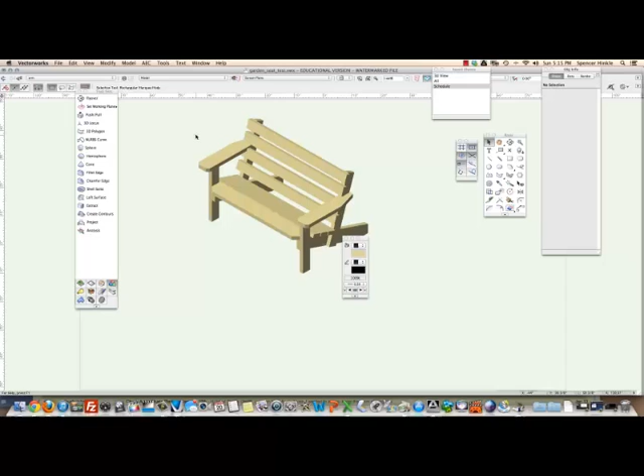If I go to a right isometric, it's going to look something like that. What we're going to do now is set up different views or different sheets. You can use those two terms interchangeably. To Vectorworks, a view is a sheet, something that you would print on your printer. So we're going to set up a sheet for the model, the 3D model, and we're going to set up a sheet for parts so that we can show all of the dimension parts separately, and we're going to show a schedule which gives us a list of parts and their sizes and number of pieces.

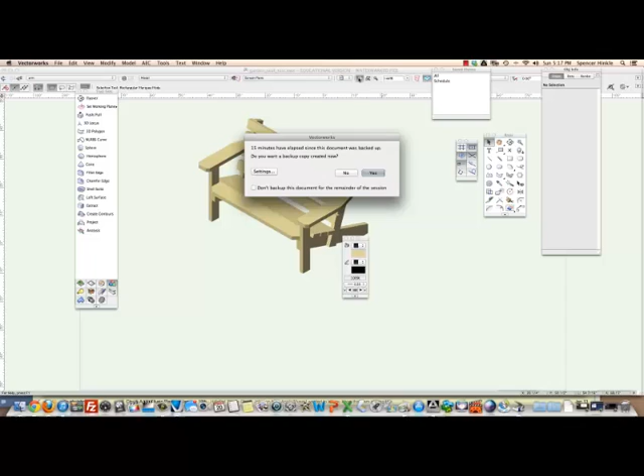Now the first thing that you want to do is fit to page area. You want to go right up here to fit to page area and click on that so that the sheet that you've chosen, in this case that's either 11 by 17 or 8.5 by 11, that's the size it's going to fit it to, and I always like to come back to that size because that sort of grounds me.

Then I'm going to come in here, go to Save View. I'm going to call this 3D View. I'm going to go ahead and save the orientation just so that it always comes back in right isometric, because that's the way I have it right now.

Now you'd want to think about this up front. Is that the way I always want to see it when I open up this view? Is this the view I'm going to want to have when I print it? You can change it, of course, but it makes it more difficult if you have to change it every time you open the thing up. So for me, that's going to be fine.

Save the zoom and pan. That's going to always bring it back to fit to page area. Save page location, and I'm going to leave rendering mode, save rendering mode and options off, because I'm going to want to change that later on. Alright, so we'll leave that off.

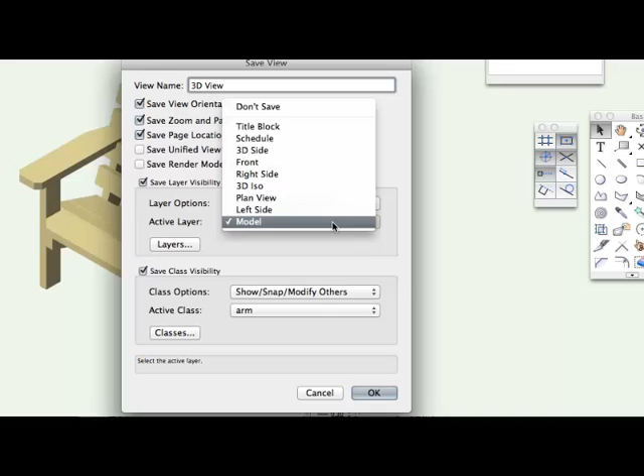Now down here, the active layer is going to be model. That's the layer that we drew everything on, right? And there we go, okay, and that looks good.

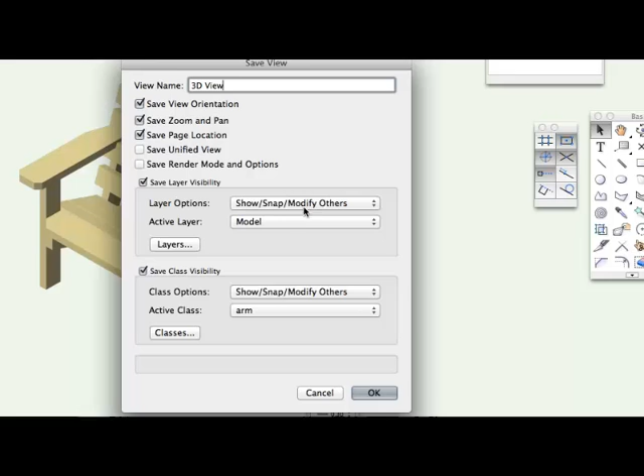Click OK. Let's go down here and make sure that model is indeed the active layer. Show, snap, and modify others, that's fine, just leave that on. Let's come down here to classes, and I think the ones you want turned on are all of the parts. You don't have to have dimension because we're not using that class. Front legs, none. Seat boards, seat front, leave all of those on. Now none, well actually I did draw, let me see here.

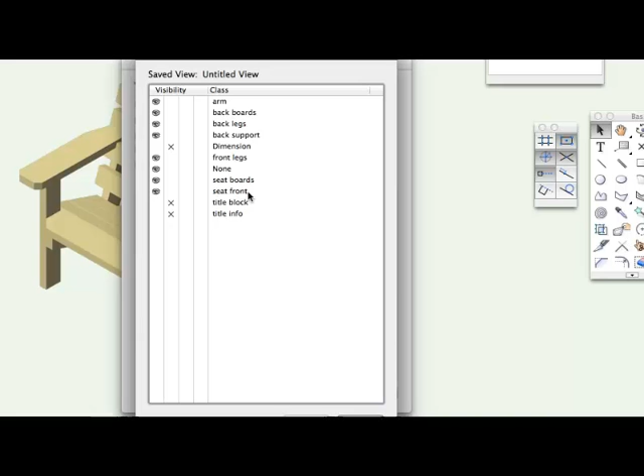Let's go ahead and save this. I want to show you something. I inadvertently, just like I told you not to do, drew everything on the none layer, or none class. Now, you know, it worked out fine. We've got a bench, I've got a bench just like you. But we should have been, as we went along, changing these to match the part to the class. So I'm going to do that right now.

It's nice that you know, you can go back and do it. I'm going to hold the shift key down and select all of these backboards and change the class to backboards, and then I'm going to select these guys here, and that is the back support. Get these legs here. Oops, get there a little more. There we go. And these are the back legs.

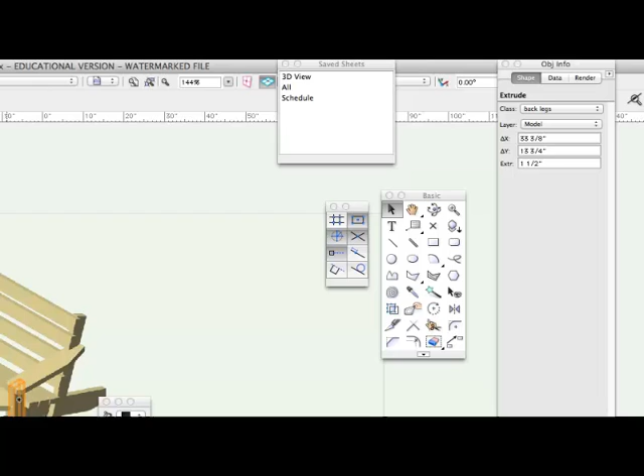Let's do the arms. One arm, two arms. Get them on the arm class. And the front seat front. And then 1, 2, 3. Did I get all of them?

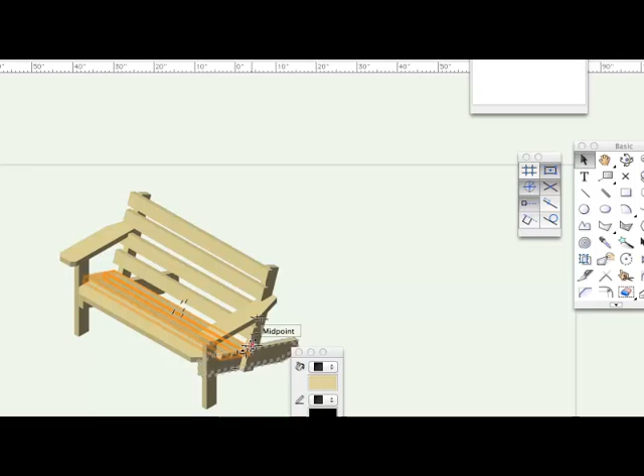There we go, all three of those are selected now, and these are the seat boards. I think the only thing I missed is this and this.

And I just realized that I never drew the little arm supports in, so I need to do that. See, these are the front legs, okay.

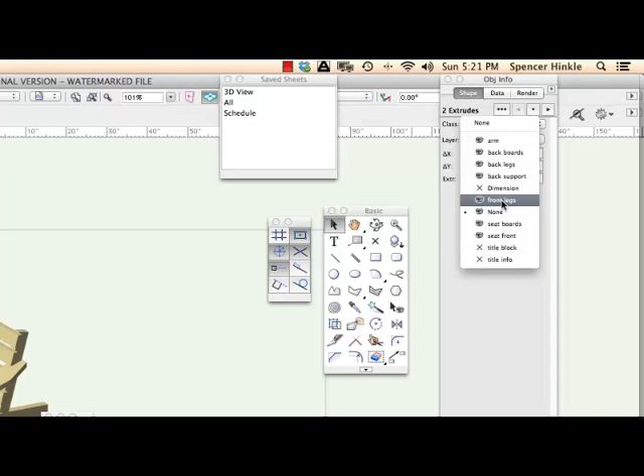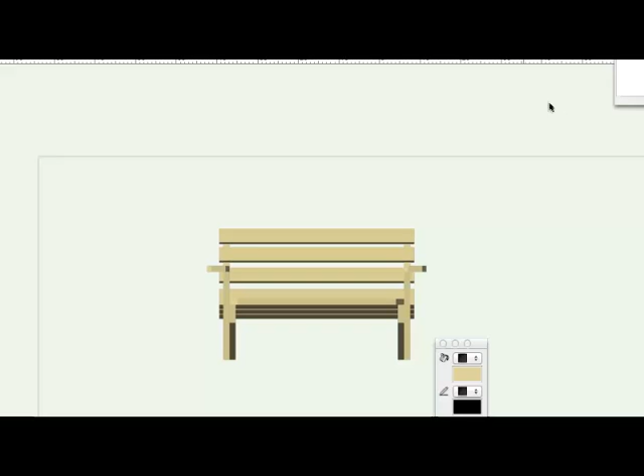And if I go to front view here, let's go over to View, Front. So I'm going to draw that little arm board, the little arm support, using the polygon tool.

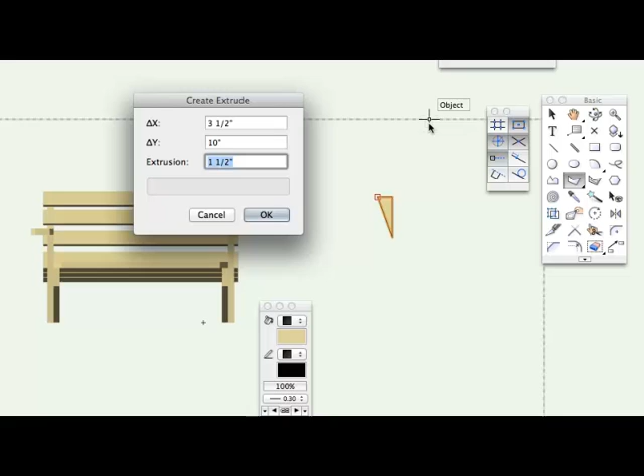Go 3.5 inches, come down. I don't remember exactly what it is, but it's something like 10 inches. And then come up, and then extrude it to 1.5 inches.

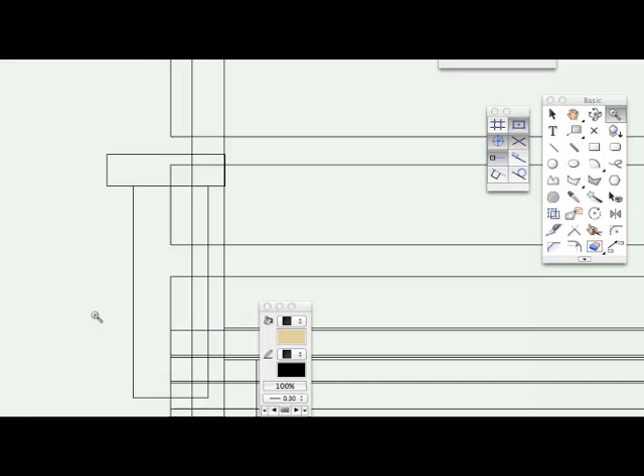I'll put this one in place over here. Now it looks like it's in the right place, but I would be willing to bet that it's not. Actually, let me go wireframe on this.

Okay, so let's get it right there.

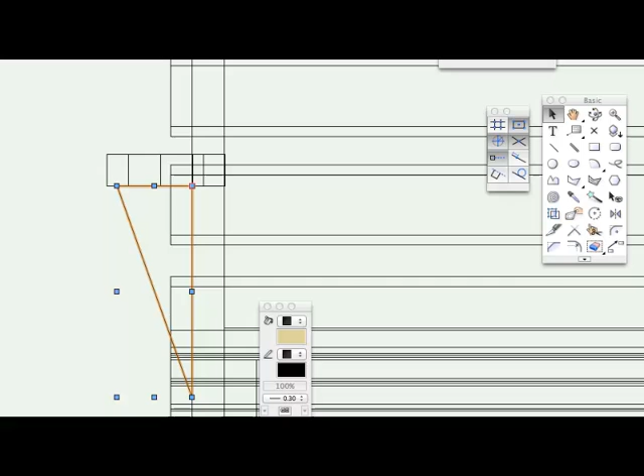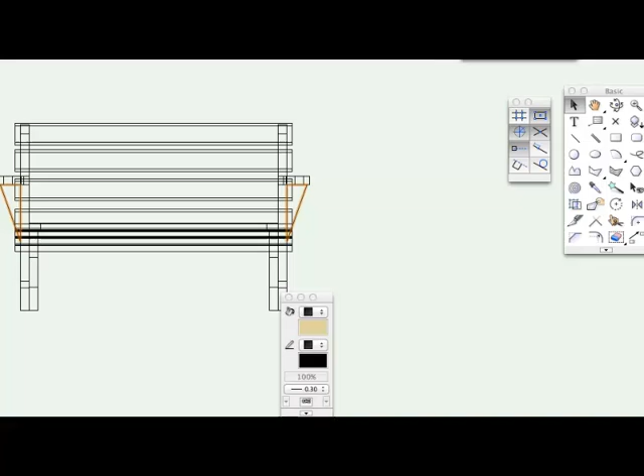And I'll go ahead and copy the other one, mirror duplicate that, find the center, and now make sure that they're both selected. And of course, they're way in the back there. There we go, now we got them.

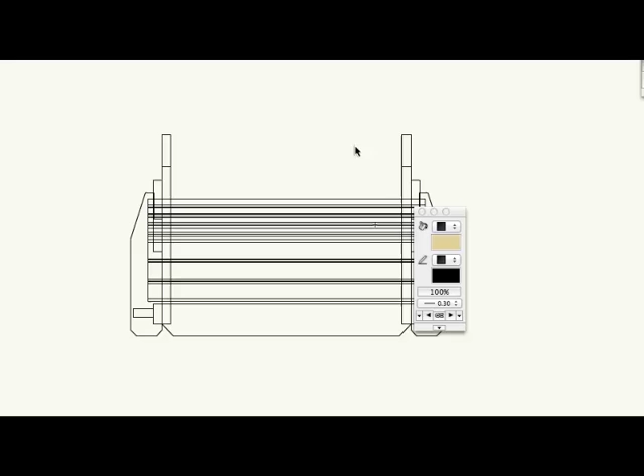All right. And I don't believe I had a class for that, but we'll just put it on the arm class. That'll work out just fine.

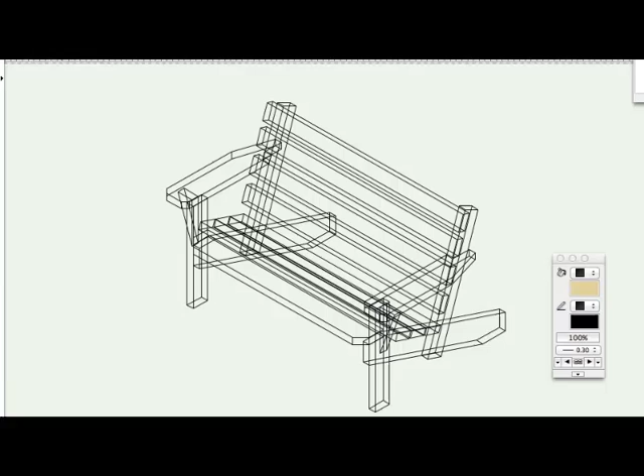Let's now go back to our view, standard view. Let's go to right isometric and view. Let's render it, just go OpenGL. There we go.

All right, great, so there's our model. We can see our little support boards there. So now we have a 3D view.

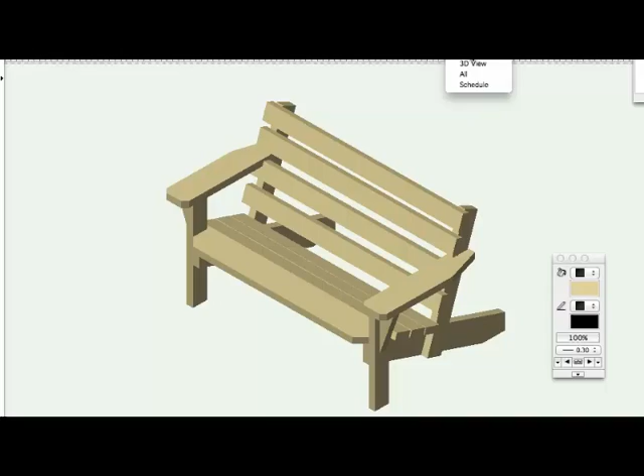And now we're going to create a view called parts. So let's go save view, let's call it parts, and save view orientation. Let's get rid of that because on this sheet we're going to have multiple orientations and we don't want it always going back and having to change it. I like the zoom and pan to save the page location. That's fine, and turn everything else, and rendering I'd go ahead and turn that off as well.

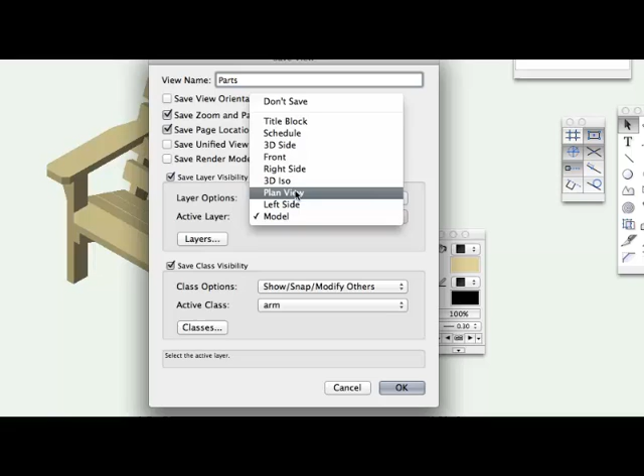Alright, so in this one we're going to make the active layer plan view, and this will reveal itself as to why later on. Let's turn on everything - oops, no, we don't want schedule. Let's turn on 3D side, front, right side, 3D ISO, plan view, left side, and then turn off the model.

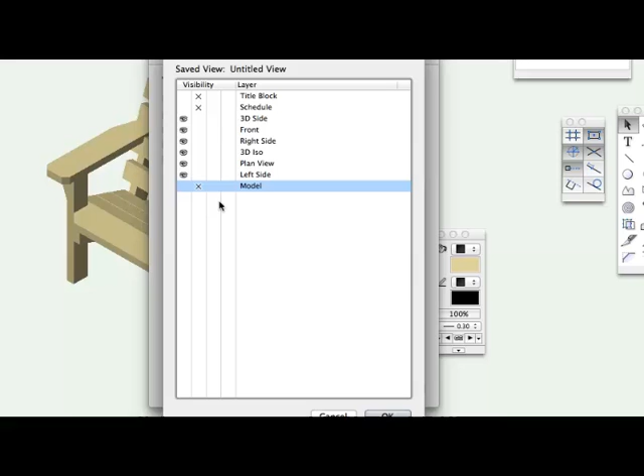Now the thing I want you to remember is that these names - right side, front, 3D side - are in name only. It does not mean that when you click on that it's automatically going to go to that view. You are going to have to change it to that view. That's just a cue to you to say, okay, when I draw the arms and dimension them, I want them in plan view. And so that's why I named that layer plan view.

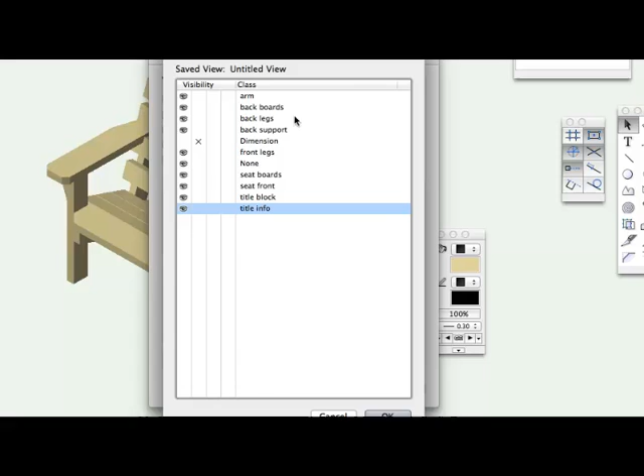And so we'll make plan view the active layer. Let's go to our classes. Right now let's go ahead and turn on the title block and title info. Dimension you can turn off. Everything else you can have turned on.

And I think we are ready to go. Let's see what happens when we click on parts. Remember, with these saved views, nothing will happen, nothing will change. You will not go to the parts view after you click OK. You have to go back up to the menu, the saved view menu, and then reselect it. And exactly what we got - we got our page, and it's blank.

So what I'm going to do now is, while I'm on this page, I'm going to go up to View, and I'm going to change it to Plan View.

Okay, so now I'm in Plan View. Now I'm going to go over to my model, go to the 3D view, and select one of these arms. I'm going to select this guy right here, that's my right arm. And I'm going to copy it.

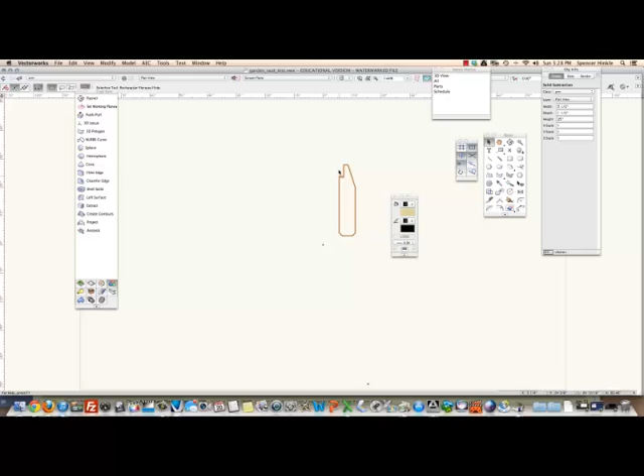Command C, Control C. Now I'm going to go back over to the parts sheet, and I'm going to hit Command V. And there's my arm. I'm going to hit Command L to turn it to the left. And there it is, there's my right arm. And if I just simply mirror this guy, I have the left arm.

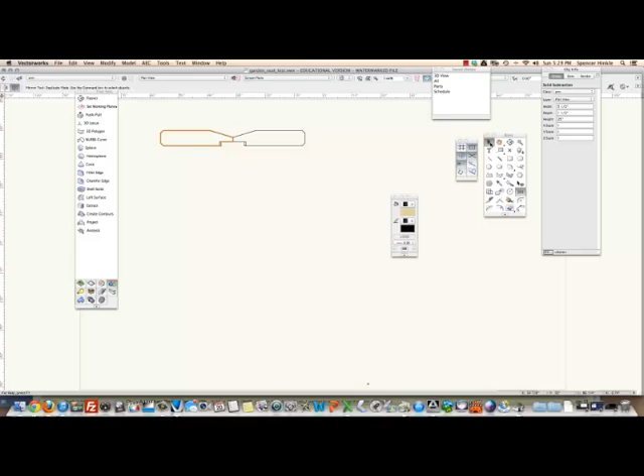Okay, now we'll worry about rendering a little bit later on. Let's just leave it the way it is.

Let's now go to, what do we want to bring in next? Maybe the, let's bring the front seat. Let's bring everything we can bring in plan view. So let's go back over to 3D view. The front seat, the seat front, I should say. Command C, I'm going to bring that in now.

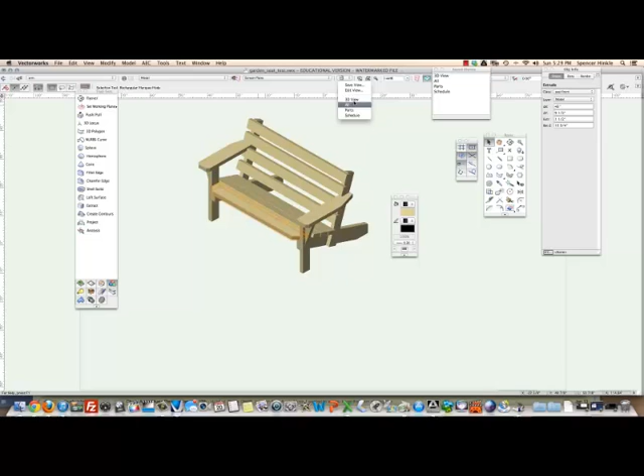Go back to parts. Command V, and there it is. And I can dimension that.

Alright, so those are the only two things that we're really going to draw in plan view, and we're going to have to decide on what part we want to do next. And I think rather than draw a part, just to show you how this works, I'm going to bring in the left side view of the entire bench.

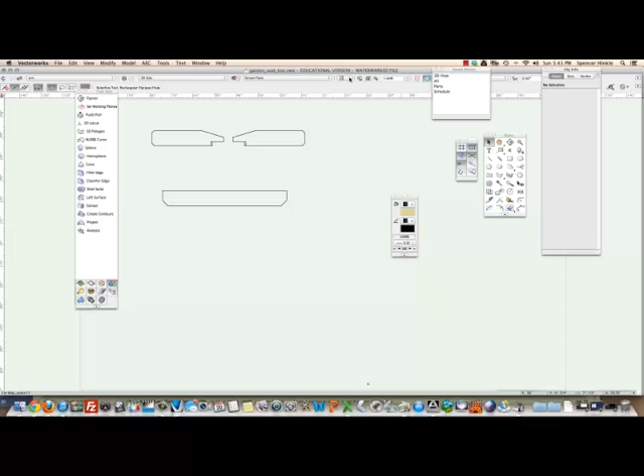Now here's the thing that you have to remember. When we set up our sheet views, or our views. Now let's go to parts. We said that our active layer was going to be plan view. So that means that every time we come back to this view, it's going to change it to plan view, which is going to be problematic for us because we don't want to draw everything in plan view on this sheet. The purpose of this sheet is to draw things in left side and right side and plan view and right isometric and so on and so forth.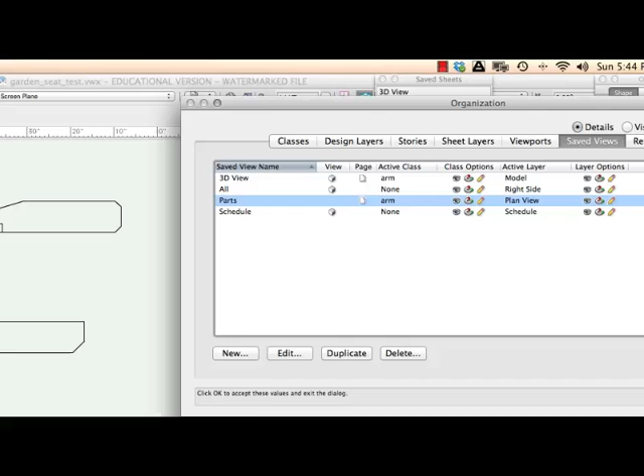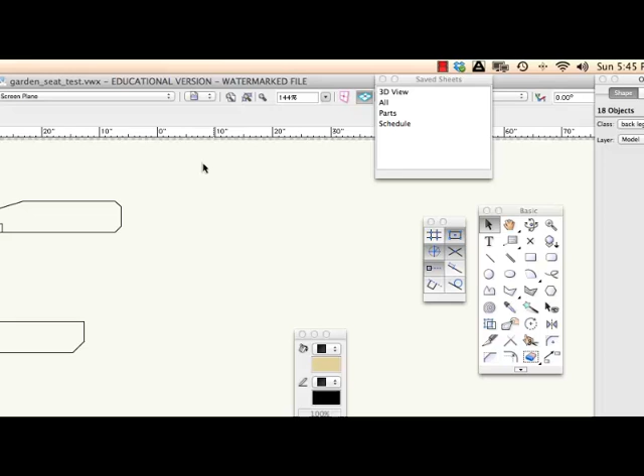So you need to do this in a certain order, what I'm going to do here. So I want you to pay close attention to this. The next thing I'm going to do is bring in the left view of the garden seat. So I'm going to go over to the 3D view, select all, and copy. Now I'm going to come back over to parts. Notice I'm in plan view, but I'm going to come up here to my layers and change it to 3D side as the active layer. I'm going to click OK.

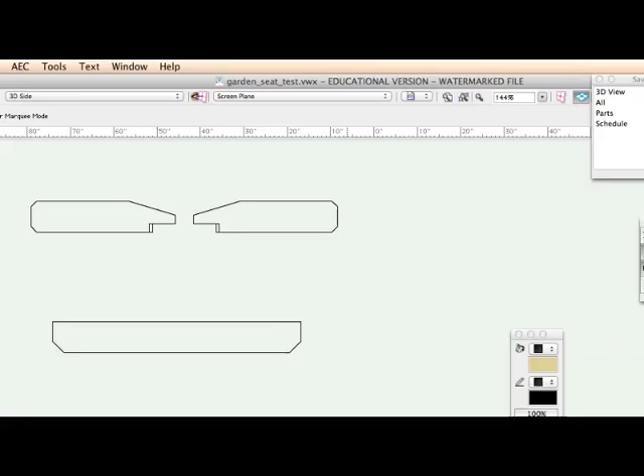Now again, remember that layer is in name only. We still need to go up to view, standard view, and let's do left. I already had it selected there. Okay, so we're in left view, everybody see that? Let's do that one more time. Standard view, left. And now I can hit Command V, and the chair comes in the way I want it.

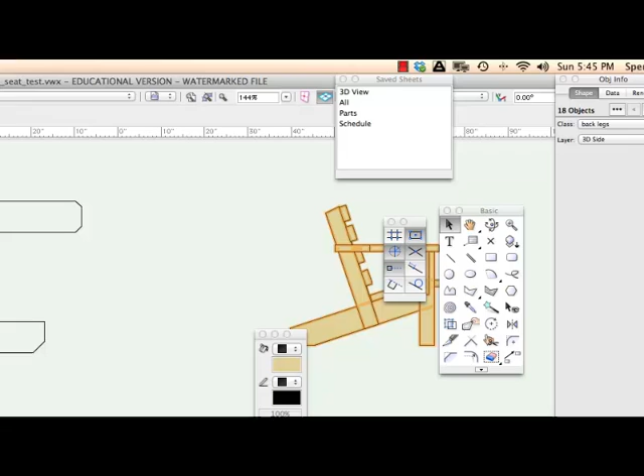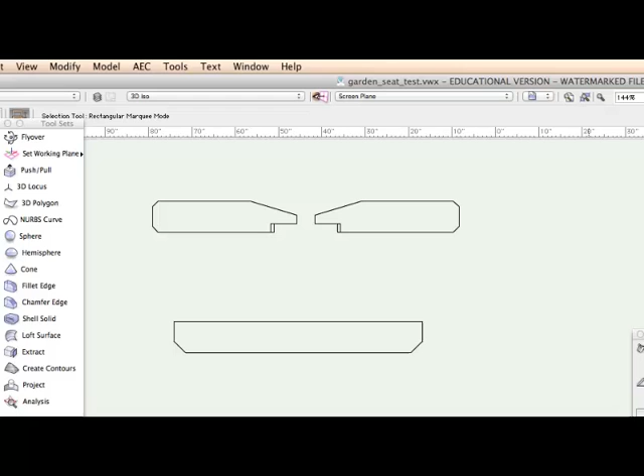Now let's go ahead and do the right isometric view. So we already have the 3D image of the garden bench on our clipboard, so we don't have to go back to model. We just need to change, and let's go to 3D ISO, and let's change the view to right ISO. Well, we'll go left ISO. Let's go left ISO, I think that's what's on the sheet. And come down here, and there it is.

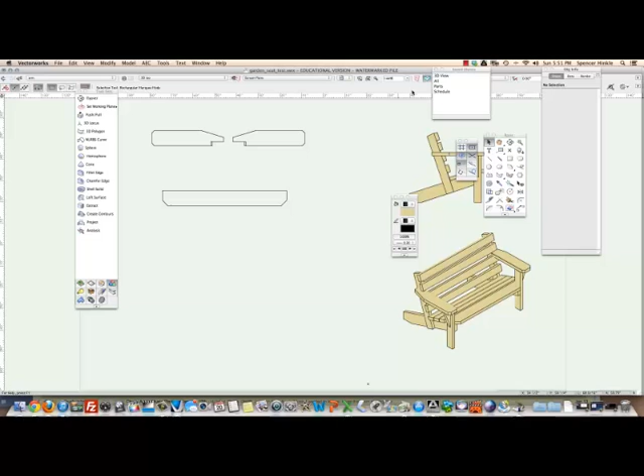So now it's your turn to draw in the rest of the parts on the parts sheet. So there you have it. I hope you have fun with this. I want you to draw the rest of the parts. Don't worry about dimensioning, we will do that on our next installment, which I believe is tutorial number 6 of the garden bench. So have fun, and I'll see you next time.